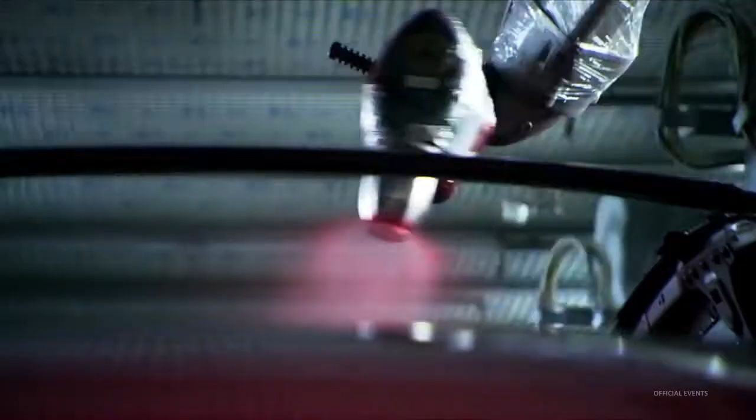This man has a vision to create the best electric cars ever seen and consign gasoline to history. This is something truly revolutionary. He wants to build his unprecedented Tesla car in a futuristic new factory and trigger an electric transport revolution. It's been a long time since something like that happened in the car business, but it's here. It's a dream many have had, but none have realized.

Aluminium bodywork, 19-inch alloys, and a $50,000 price tag. At first glance, this car is the latest in a long line of high-end sedans. But that is where the similarities end.

The Model S is a totally different type of car. Tesla believe it can lead a revolution and change the face of motoring forever.

It's the first ever mass-made premium sedan powered purely by electricity. Designed to have speed and range, and not a drop of gas. Our goal is to create an electric car that is the best car in the world and show that's what an electric car can be.

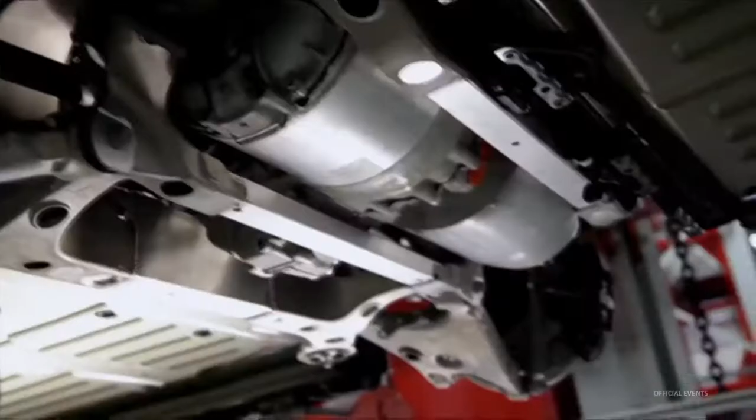Tesla's goal is to kill off the combustion engine and prove the electric car has finally come of age. Driving a gasoline car is going to feel like yesterday. Driving this car is driving the future.

This is Elon Musk, Tesla's co-founder and CEO. Elon is an inventor and a maverick entrepreneur, one of America's youngest billionaires. I like exploring, I like technology, I like creating things that have never been seen before or even imagined before.

He is a genuine Silicon Valley success story. In the mid-1990s, Elon set up a small internet company. By 2002, he'd sold PayPal for $1.5 billion. Next, he founded private rocket company SpaceX.

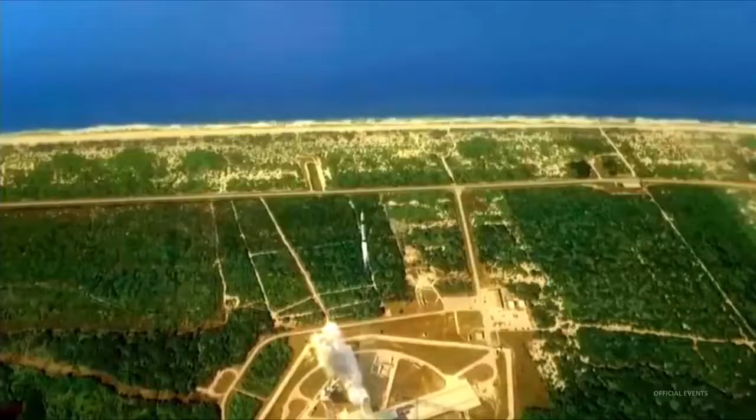It's all part of Elon's life mission. When I was in college, I tried to think about, well, what are the areas that would most affect the future of humanity? So the three things were the internet, making life multiplanetary, and the third being sustainable energy. So that's what really ties together my companies, that thought from 20 years ago.

Tesla Motors is Elon's sustainable energy brainchild. Named after electric power pioneer Nikola Tesla, it's a car company that only makes totally electric vehicles. No hybrid and no alternative fuels. Absolutely no tailpipe. The company estimates their electric cars cause 50% less CO2, even if much of the electricity comes from a coal-powered plant.

It's technology Elon and co-founder J.B. Straubel believe we need. We're solving problems for our children, our grandchildren. Oil is a finite resource, and eventually we have to find alternatives. When you take that oil out of the ground and burn it, it's extremely dangerous. We should not play Russian roulette with the atmosphere.

We only got one. Tesla's founders have a vision of a world without gasoline cars. They are convinced electric is not only cleaner, but better. Now, they want to prove it to the world.

They believe their cars can trigger a transport revolution and bring electric motoring to the masses. What we're doing here at Tesla can have an amazing impact and revolutionize the auto industry and make every car on the road electric. That's our end goal.

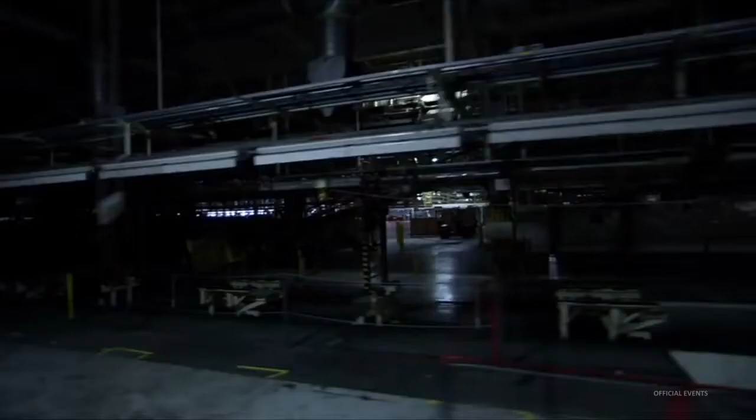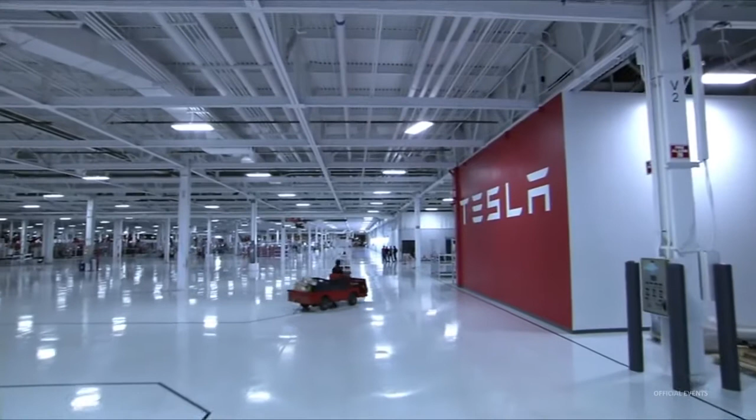The company purchased a former GM and Toyota site in Fremont, California, on the edge of Silicon Valley. The abandoned facility is a traditional car factory: dark, little natural light, bare concrete floors. When Tesla Motors move in, it's the birth of a mega factory like no other. It's a totally fresh approach to car manufacture.

The walls and floors are painted white, the machinery a striking red. Skylights and windows flood the factory with sunlight. If you make the factory pristine and clean, that sets the tone for the vehicle. We want that same sense of quality and precision in the car itself.

As part of the whole company ethos, bikes are provided so the workers can get around the factory. I think it's important to have an environment where people look forward to coming to work, so it's worth putting some effort into making the factory beautiful.

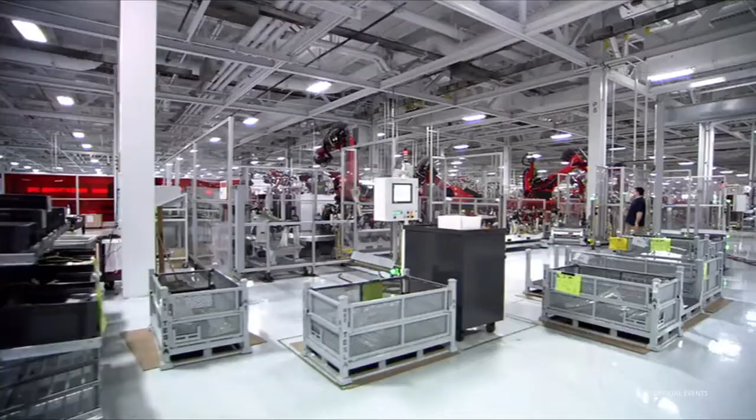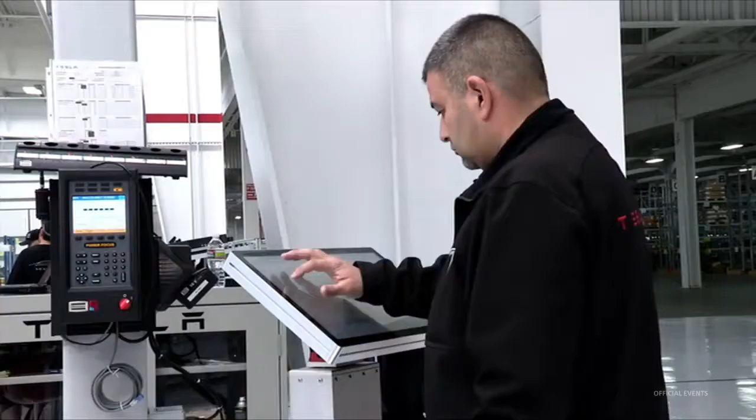In true Silicon Valley style, they fill the space with the most advanced technology, creating an automated production line capable of building tens of thousands of cars. Super efficient multitasking robots, self-guided smart carts, and computerized production schedulers.

The factory is designed to be up there with the very best in the world. We love engineering, we love beautiful machines, we love new technology, we love to innovate with high technology. And also in manufacturing, we love to do that.

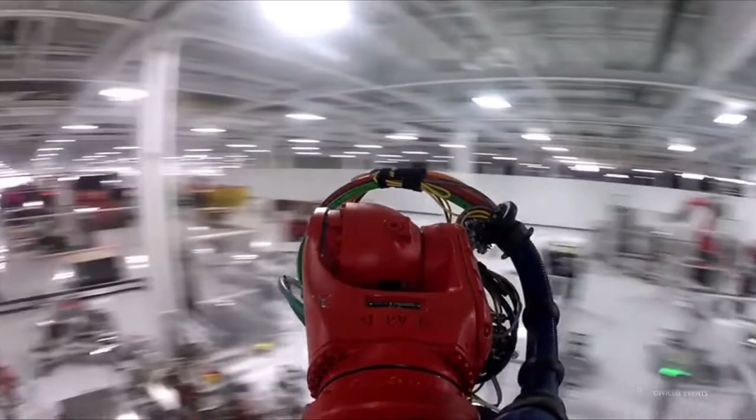Without training, these sophisticated robots are useless. They all need to be taught before they can run tasks automatically. Every robot is programmed by hand. The Tesla team has meticulously trained 130 sophisticated robots over a year and a half.

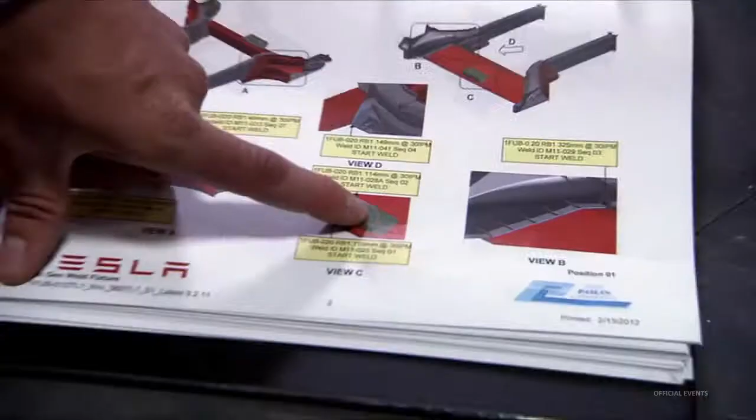One of the last robots still to be programmed is a multi-point welding robot. It will be used to join the car's underbody. These are pretty busy robots, so we gotta make sure that our takt time is good.

A robot's work is only as good as the man who trains it. Brad Johnson is a welder with over 25 years' experience at the highest level. Getting this done today, we'll have the teachings all nice and smooth, and then we can start running 100% and full automatic. That sounds good.

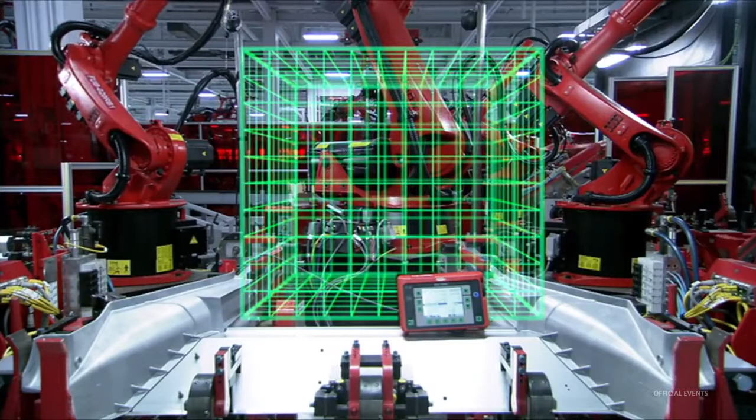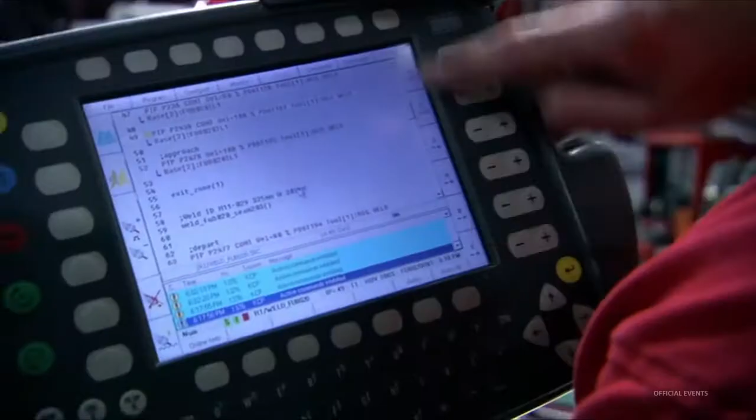The space in which the robot operates is treated as a three-dimensional grid. The head can be manually guided to any point using a teach pendant. There's our start point and our weld position. Brad guides the robot millimeter by millimeter and uploads the coordinates. The robot works out the most efficient route and runs the program.

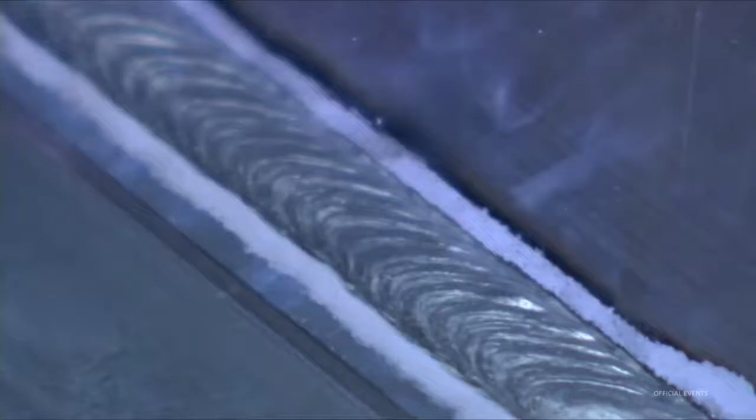Looks like the teaching is right on mark, and we have a really good quality weld right here, so we should be able to run full auto with this weld. When full production begins, Brad's handiwork will be exactly replicated by the robot 100 times a day.

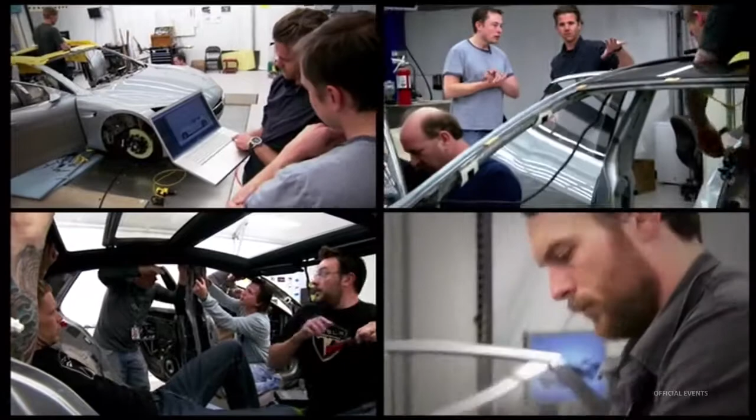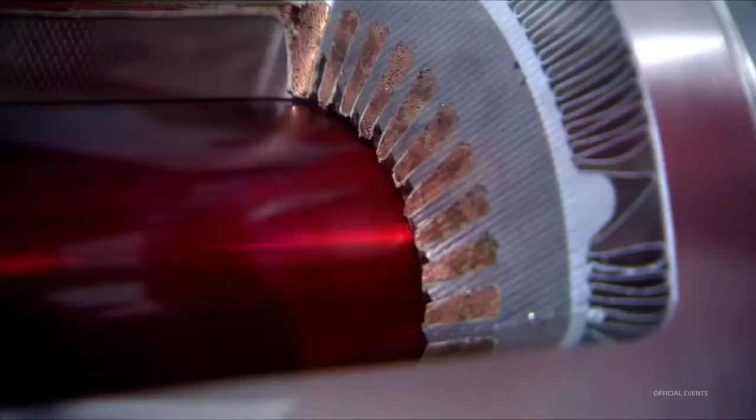Since their inception in 2003, Tesla Motors have been pursuing their electric car revolution with a step-by-step strategy. In an unconventional business move, Elon decreed that Tesla must invest in their reputation first and worry about profit later. Stage 1: make a small number of high-value cars that prove electric power can be desirable. The Tesla master plan is very simple - we start off creating an expensive, low-volume car to help break the mold in electric vehicles.

Plan in place, they set to work on their first car, basing it around the British-built Lotus Elise. Five years later, they released the Tesla Roadster. Quicker off the blocks than an Aston Martin Vantage, the electric sports car astonishes the motoring world.

Step 1 complete in the Tesla strategy. What we showed was that an electric car could be sexy, it could be fast, and it could be long range, and that if you produce such a car, people would buy it. But as a $100,000 two-seat sports car, it's a luxury second vehicle to most of its owners.

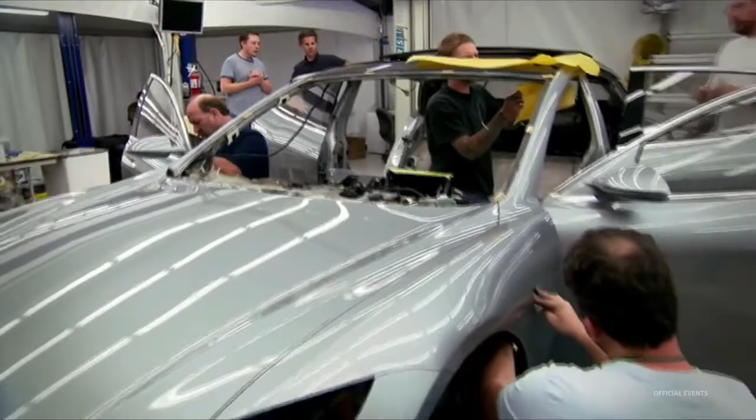Time for the pivotal Stage 2 in the master plan: a car that costs half as much and sells in much bigger numbers. A very important step in the Tesla strategy is really going to show that a mainstream electric car can be better than a gasoline car.

The Model S is the second step in Elon Musk's vision of an electric revolution - a premium mass-market sedan designed and built from the ground up by Tesla.

At the studio in Los Angeles, they are working to craft that car. The Model S is really the foundation of Tesla. It's the first true product designed, engineered, built, manufactured by Tesla, and it's really the beginning of what our mission is about.

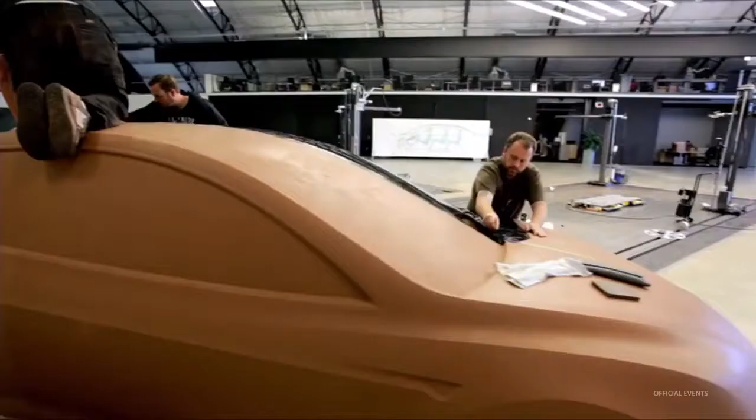Franz von Holzhausen is the chief designer. He believes Tesla's design needs to have some conventional appeal. It's really easy to have a clean slate and go pretty crazy with that. We had to start with something that people could relate to, if they even knew or cared that it was an electric vehicle - they were attracted to it.

We've stretched the sedan and made it a little bit more modern, but it's still a sedan. It still has this somewhat traditional cue, and so it's easy to love because of that association.

Although uniform in appearance, the Model S is a unique car. It was conceived as electric. Even the shape is designed to maximize the battery's range. The body and waist are all slim, so there's no excess fat or body mass on this car. That translates into great efficiency.

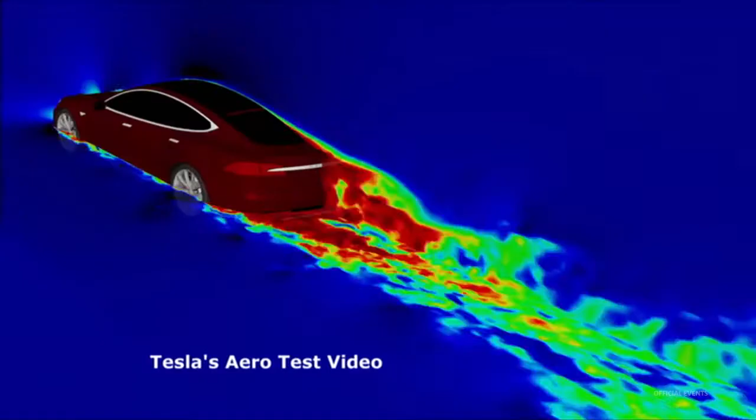This car is one of the most aerodynamic sedans on the market. In an electric car, conserving battery power is so important that the designers put huge efforts into reducing the drag. Even the door handles are aerodynamic, receding flush into the body.

But it's the interior that is most heavily influenced by the electric powertrain. The powertrain is incredibly small. You get the same performance out of a motor that's the size of a watermelon, fitting between the rear wheels, and everything else above that is what I call the opportunity space.

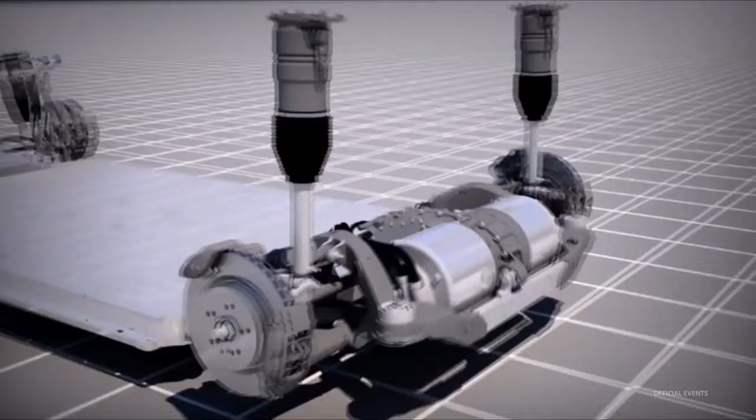The design team started with the motor and flat battery pack and worked upwards. With the motor next to the wheels, there's no need for a drive shaft, so there is no rise under the rear middle seat. There is no fuel tank or transmission. The Model S has free space from the floor upwards.

What you'll see is a vast amount of space. In fact, it's actually so big that we decided we could fit 7 people, and we do that by putting 2 rear-facing child seats in the back here. You can see where they fit, and their legs go right down in there.

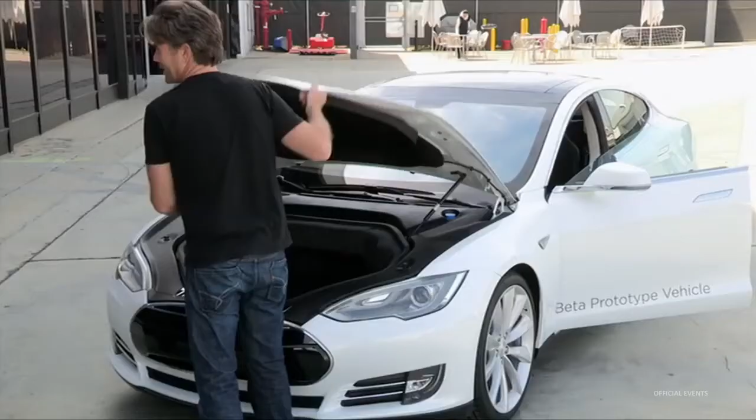So this is what we call the frunk, the trunk in the front of the car. Arguably you can put a whole bunch of stuff in here, even when the back of the car is totally loaded up with people and kids and stuff. And who doesn't need one of these?

Tesla promote these unique features at every opportunity. As a new marque, they're trying to make an impact in a marketplace crowded with established big hitters. Just looking at the United States, of the 3 other car companies, the youngest is 90 years old. So clearly this is not an industry that has been supportive of newcomers.

The Geneva Motor Show 2012. Another leg in the company's relentless promotional campaign. We're done selling Roadsters in North America, so this is our product, our Tesla product, and therefore we need to get it out to start selling.

Industry experts are judging Tesla on the Model S. It's seen as make or break. Maybe Tesla has a bright future. I think the Model S is very decisive to see if there will be a great future or if there won't be a future at all.

The company have taken the risk of collecting prepaid orders on the car. They've amassed nearly 10,000 advance sales. The financial boost also creates real pressure. I get harassed quite a bit actually by some people who have reservations, and it's a lot of expectations, very high expectations that we're going to have to meet and exceed, really.

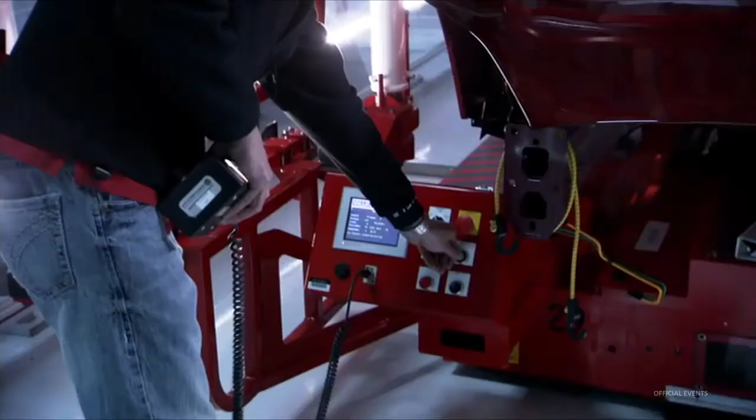Tesla need to build 20,000 cars a year. But before mass production can begin, Gilbert and his team must prove the factory is ready. The company is relying on them to get it right. We have to make sure that car after car, the quality is there, everything is perfect along the way. So we are really gearing up towards a production ramp-up.

Over the next few weeks, the factory will test manufacture a limited number of Model S. If the line doesn't perform with these cars, the company will be forced to miss their deadline. Tesla's electric revolution would be over before it started.

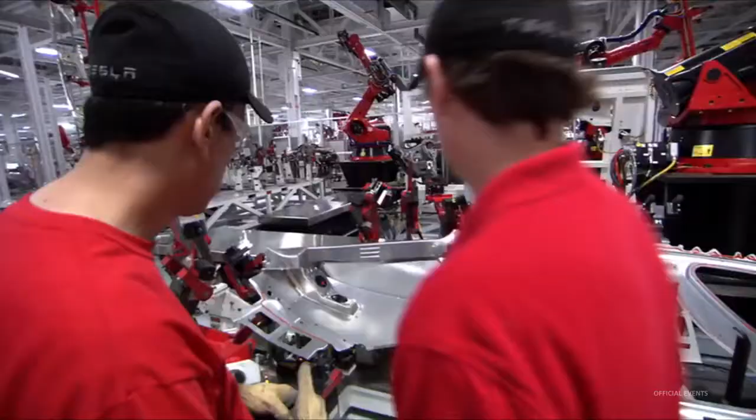A very, very important moment is the birth of Model S in our Tesla factory, and it's where the rubber is going to meet the road, so to speak. The process begins in stamping. To increase the battery's range, the company have decided to build 97% of the Model S with lightweight aluminium. It's an extremely rare feature in a mass production car due to the cost.

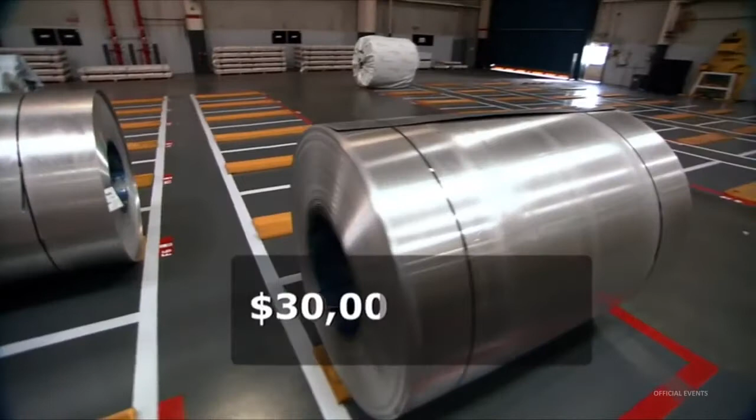Every Model S starts as one of these. The roll is loaded into the mechanical cutting machine.

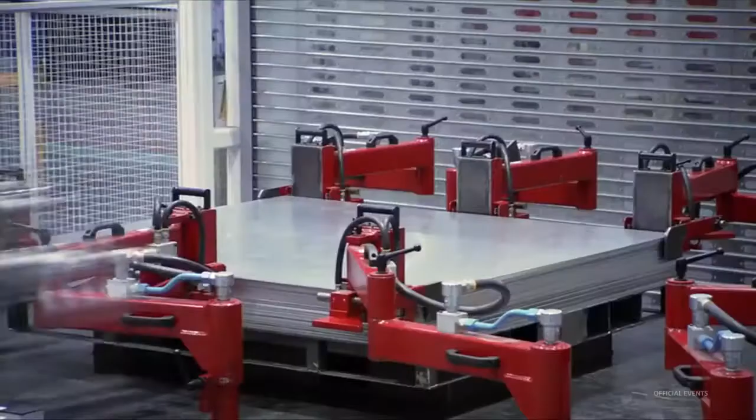Once cut, the panels are passed to the stamping press. We need to translate flat pieces of aluminum into 3D forms, and how to do this with the level of quality that we expect is really, really challenging.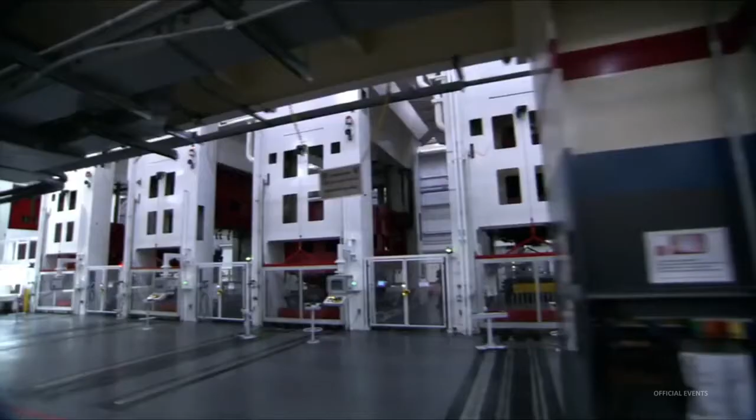To meet the challenge, they buy the largest available stamping press in North America. It's one of the first pieces of equipment they install. Over 3 stories high, it has to be transported from Detroit on 70 trains and then entirely rebuilt.

The immense pressure from the stamp allows them to press the complex body shapes needed for the Model S. It can be mounted with different heads, known as dies, that mold the panels into a wide variety of shapes.

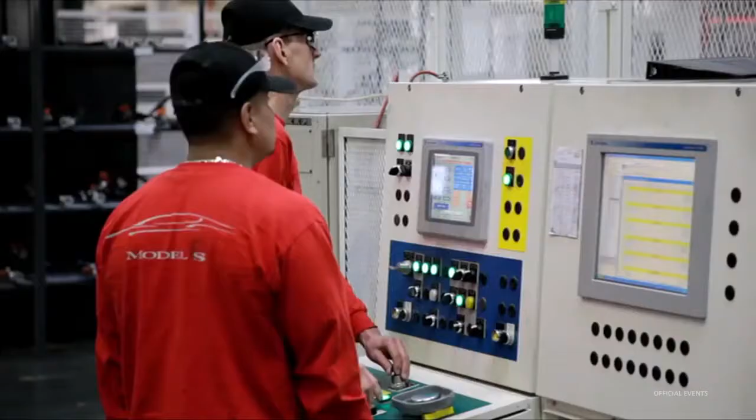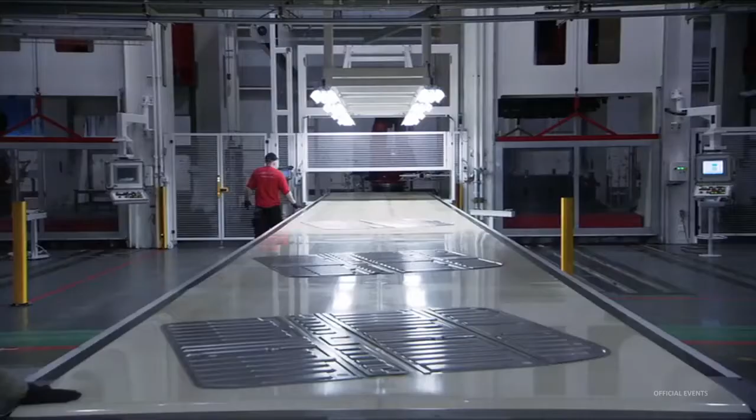Robotic arms feed the 4 stamps. Each stage forces a more detailed 3D shape, producing stacks of floor plates. These lightweight aluminum parts improve the Model S's power-to-weight ratio, which helps increase performance and range.

The 2 things that obsess co-founder and technical chief J.B. Straubel: 'Any ideas on how we could make it better?' Performance and range were the 2 big issues that needed to be improved, and that's where we've put most of our focus on the technology and powertrain.

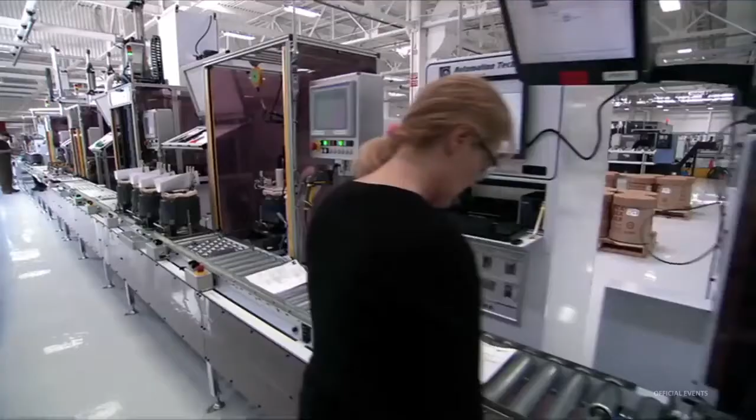Powertrain manufacture, 2nd floor. This is where they build the heart of the Model S, the motors and battery packs. Tesla know the electric powertrain will define their cars, so they push to advance the technology themselves. This is an extremely exciting field where inventions continue to happen even faster than they did in the years previous.

Tesla's solution to improving battery life appears startlingly simple. They use thousands of small lithium-ion cells, similar to laptop batteries. Thanks to these regular batteries, the company say the Model S has achieved a top range of 480 kilometers.

Once you have 250 to 300 miles of range, then you're in a different usage mode. You're in a range that is equivalent to most gasoline cars.

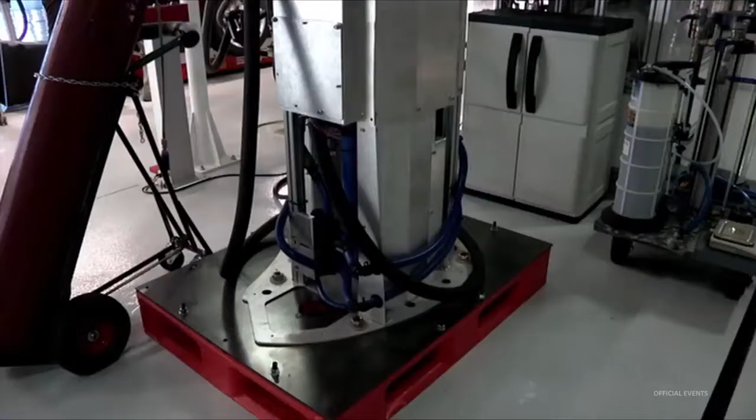The car can be charged by 100 kilometers every hour from a regular power outlet. Ultimately, Tesla are hoping to install superchargers along major highways that can charge the car to capacity in 45 minutes. You can charge the car up every night, but you don't need to. You can actually charge it once a week.

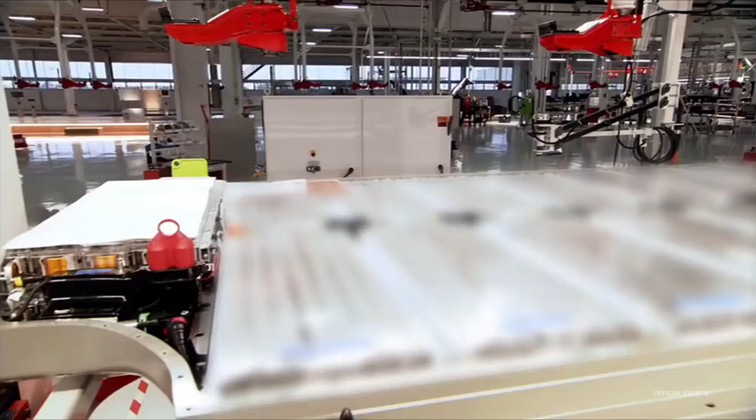The high-performance battery pack is formed with over 7,000 small cells. They're organized into a flat layer with specific groupings of positive and negative. The final layout is the key to the pack's power and range, and Tesla considers it absolutely top secret.

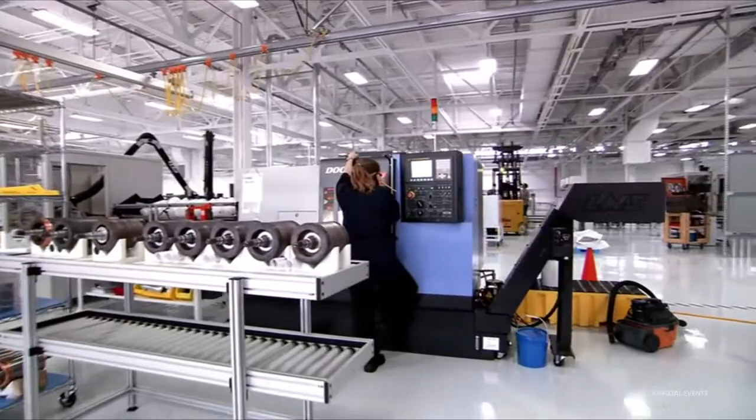The motor unit is also developed in-house. It's essentially an AC induction motor, a concept invented by 19th century scientist and Tesla Motors namesake, Nikola Tesla. He harnessed an electromagnetic field to turn a basic motor.

Modern-day Tesla has developed their motor with a highly conductive copper cylinder. When the electromagnetic casing is fed with current, the copper cylinder inside starts to spin. It's nearly 3 times more efficient than a combustion engine.

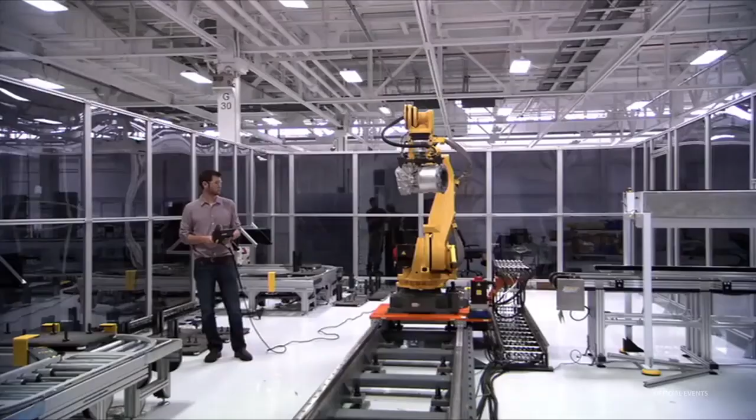In fact, there are only 3 moving parts. It connects directly to the rear wheels and doesn't need a transmission. These are the 3 moving parts in the whole Model S powertrain.

One of the cool things also with this very simple gearbox is that when we want to go in reverse in the car and back up, all we have to do is spin the motor in the other direction, and the car backs up. We don't need a clutch, we don't need a separate gear for reverse.

The entire drive unit is under 1 meter long, smaller than a golf bag. But it propels the Model S, a family-sized sedan, into the class of performance cars.

In fact, this powertrain creates a totally different driving experience. Program Director Jerome Guillen works constantly to refine it. As with the light switch, electric power can be fully applied instantly.

The first thing that's gonna surprise people is how much torque you get so quickly. That instant response, you cannot really mess with the throttle too much because if you push on it, then the car will go.

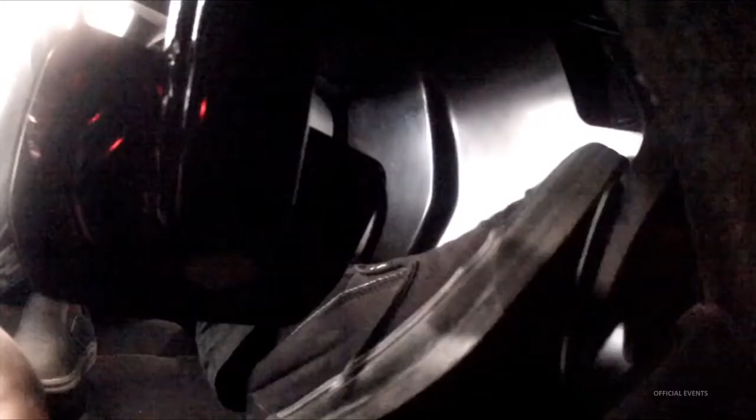But the real evolution in the way you drive is down to one of the central innovations in electric cars: regenerative braking. Although the Model S has traditional brakes, you don't have to use them. Regen braking can be engaged by simply easing off on the accelerator. When you want to brake, you just take your foot off the pedal, like I'm doing now, and the car brakes itself. So you don't need to use the mechanical brakes. When active, the regen system magnetically resists the motor's rotation, slowing the car and harvesting electric current.

The energy recovered recharges the battery and extends the range of the car. When you put your foot down again, the electric power returns. Tesla calls it one-pedal driving. It's a little bit different approach to driving, but once you realize that if you take your foot off the pedal, the car slows down, it's like, whoa, this is great. I can drive using only one pedal.

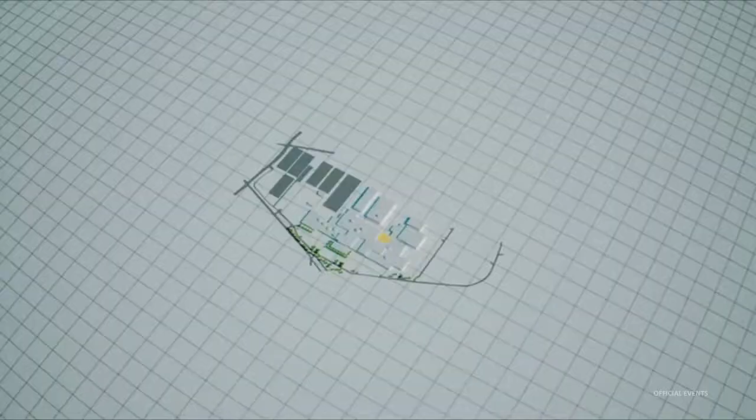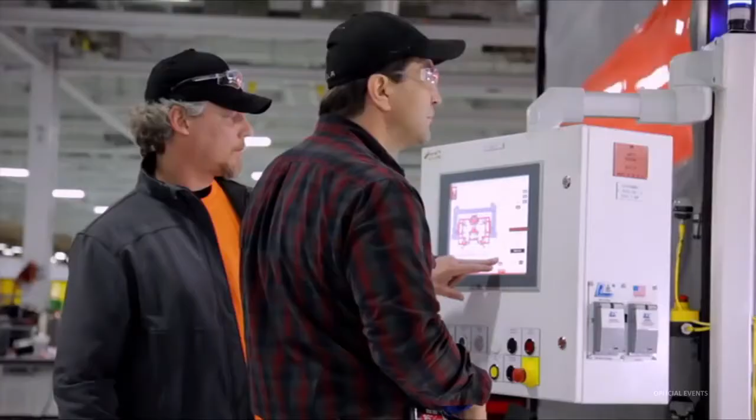In the factory, the delivery deadline is fast approaching. The Model S test production cycle reaches the main assembly area. The car is based around an aluminum underbody. To make it, engineers weld struts and casts into a framework. Brad's newly trained welding robot is about to be tested in full automation. They have trained the robots with prototype parts. Now, with final components coming through successfully from stamping, it's automated production for real.

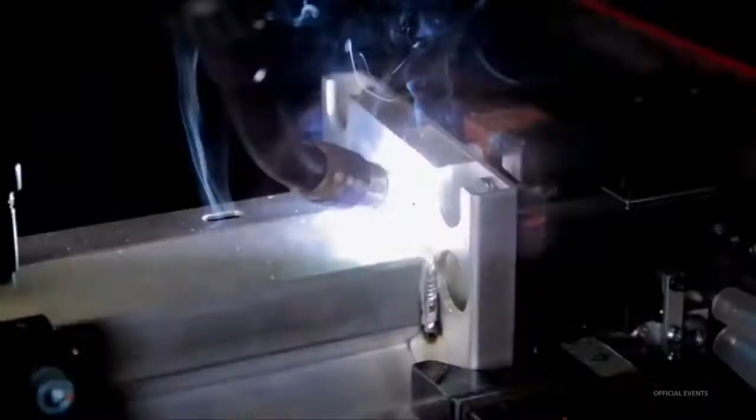Under observation, it's a tense time for the team. The robots work in a tightly coordinated chain. The second phase hits an issue. It shuts the whole process down.

With the deadline looming, Elon Musk is determined to keep Tesla's waiting customers happy. He's organized a Model S test drive event for people who've placed deposits. The test ride will go out onto Jack Northrop Boulevard, so you'll get a chance to see that this isn't some show car that doesn't actually do what it says. It will go fast and with a lot of people in it. And quiet. Yeah.

Many have prepaid years ago, and it's their first time inside a drivable Model S. Customer and board member Steve Jurvetson captures his experience on his mobile phone. Wow, this is insanely cool. It's a surreal scene. It's way cooler than I can imagine. You really decked this out. Yeah, it's nice. The first ride has to be documented here.

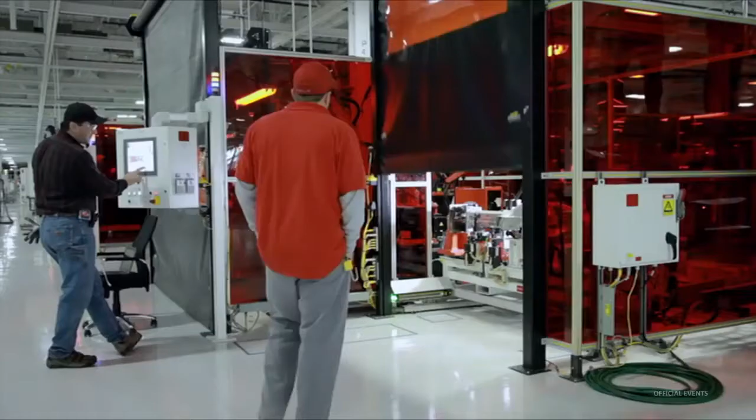With only weeks to go, welding has hit a glitch in automation. One of the robotic clamps is millimeters out of line. It's a tiny difference, but enough to disrupt the process. With the way the robots work and how we have such a tight tolerance of 1 millimeter to stay on, sometimes the new parts won't reach a prox or the clamp won't close all the way. A major delay will disrupt the whole production schedule and threaten the deadline.

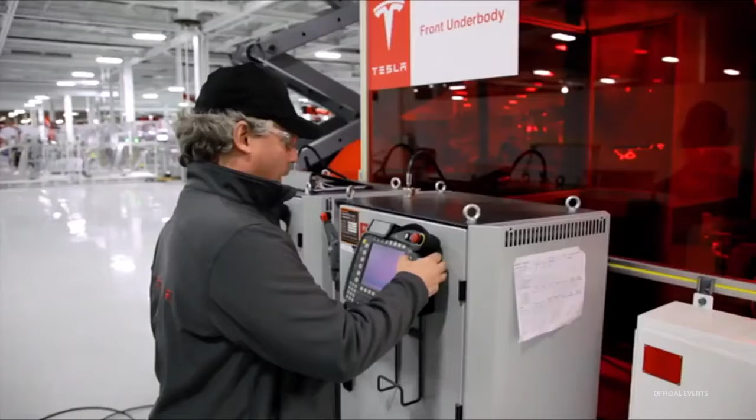They adjust the settings and set the robots in motion again. This time, it goes off without a hitch. To the team's relief, the process can be approved for mass production.

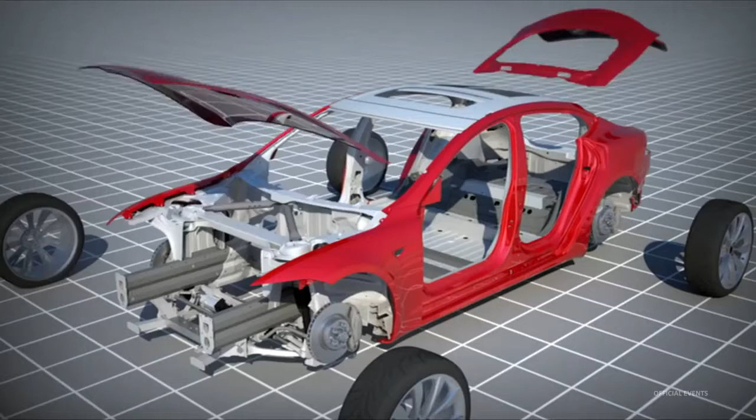The run through the automated line reaches the Model S exterior. The Model S body is made up of 14 different sections. To speed the workflow, Tesla construct each section at separate sub-assemblies. Door sub-assembly: the internal frame is joined to the exterior panel. As the robot's pincers come together, they fire a rivet and join the aluminium sheets.

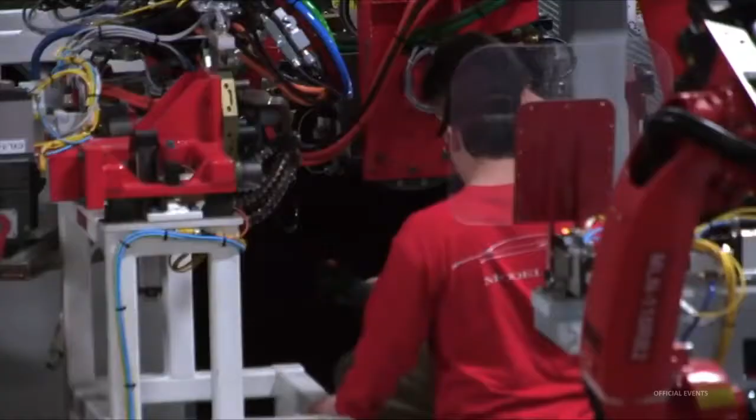Over to the right, side body sub-assembly. One of the most advanced aspects of Tesla's robots is that each arm can perform a variety of different tasks. We have to use all the gamut of technology to make the aluminum joint between stamping and welding and riveting and bonding, using robots that are multitasking. This flexibility is essential for a compact and efficient workflow.

A robot can spot weld using a pincer tool and then automatically detach the pincer and pick up a clamp tool. The same arm that joined the panels can now move it to the next station. It's clever, but tricky and needs constant refining. When you draw something yourself, you take a pencil, then an eraser with the same hand, and you change the tool, so to speak. Same thing here.

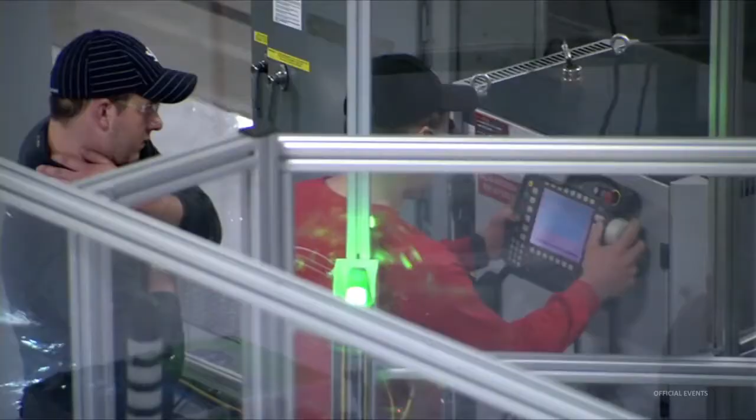Once assembled, the sections are brought together at body assembly. Here, they're riveted around the welded underbody to form the basic shell of the car. All the sections are lined up alongside the central framing line. Gradually, the automated line builds up the side sections, ready to house the doors.

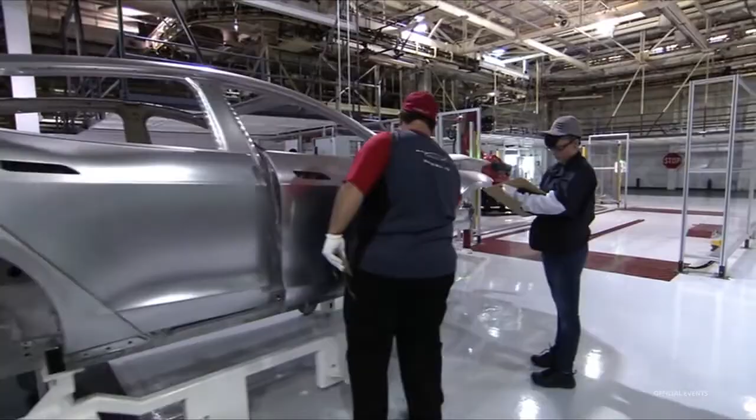A test batch of 3 cars is complete. Body assembly has demonstrated it can run successfully in full automation. It's a vital milestone in the countdown to mass production.

Completely assembled, the aluminium body is now known as body in white. It's ready for some color. The body in white is loaded onto an overhead train that carries it to the paint area.

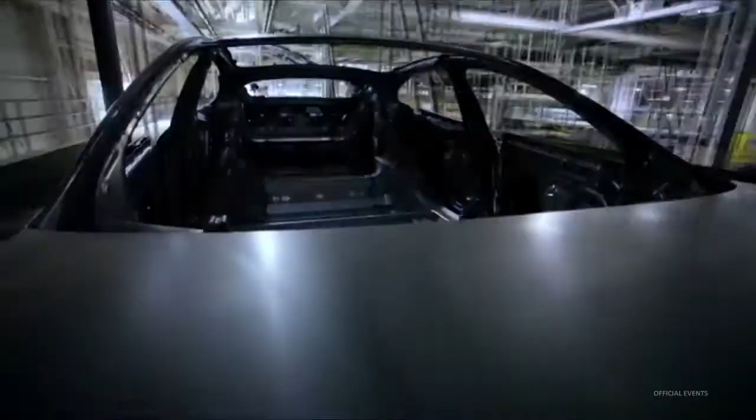At this vast facility, the paint center is in a totally separate building. The Fremont site covers nearly 95 football fields of space. It's so big, the Model S production line only fills 20% of it.

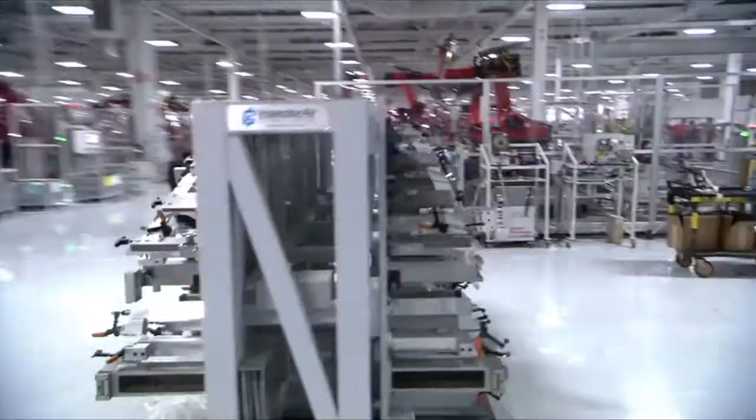For Gilbert Passin, the extra space is the cornerstone of Tesla's grand strategy for an electric revolution. The Tesla factory is huge, about 5 million square feet on 2 levels. Right now, we are only utilizing a small fraction of the space, but most of it, as you can see behind me, is what we call the dark side. It's sort of dark and not utilized yet, even though we have a lot of plans for the future on how to fully utilize this entire building.

These expanses are an integral part of the company's stage-by-stage building plan. They want to fill the space with a production line for a further range of Tesla vehicles - a very high-volume, economy-priced model, the Stage 3 car. In the future, we intend to expand our range of vehicles, maybe of a smaller size and also more affordable for the market. And this factory is ideal, and we are going to make this a super mega factory.

Long term, Fremont is meant to produce the low-cost Stage 3 electric car in the millions. It's the final step in Elon Musk's Tesla master plan. To really have widespread adoption of electric cars, we have our 3rd generation vehicle, which would be a low-price, high-volume vehicle, and that's really what's going to fill out the rest of this humongous factory. I'd love to bring this to 500,000 vehicles a year as soon as we can.

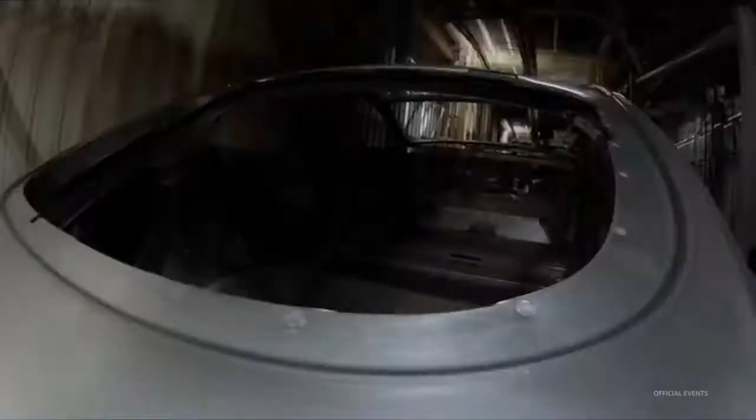The future of Elon's strategy first depends on the success of the Model S. In production, the time to the delivery deadline is now running low. The aluminium body arrives on the overhead train from Body Center to Paint Center. This is where they make the car look like a premium sedan.

It's a state-of-the-art process. There's a lot of technology that goes into the Tesla car, but the very first thing they'll tell you is what color of Tesla car they bought. That's how important the paint is.

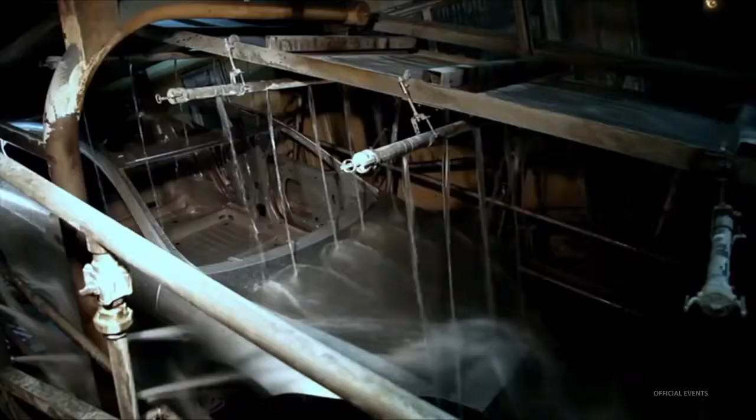First, a roller coaster ride of treatment baths. Detergent to clean the surface, and then electrocoating. The electrocoat helps attract the paint to the aluminium.

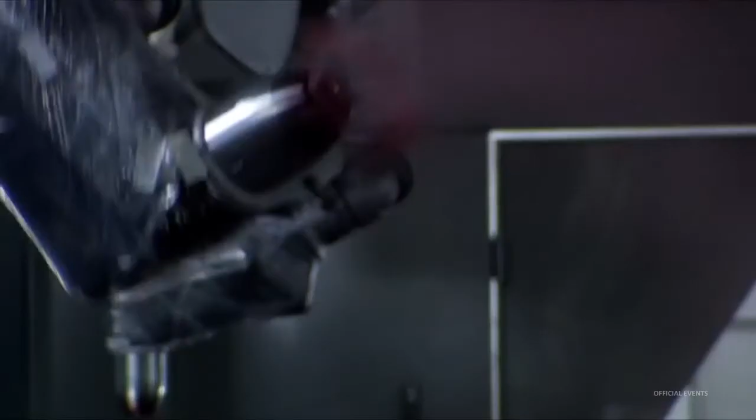The primed car is ready for colour. This vehicle will be sprayed with their trademark tint, what Tesla calls Signature Red. It's a color that we developed that's different than anybody else's red. It's been developed with glass flake to get the specific type of sparkle that we want to get in that paint.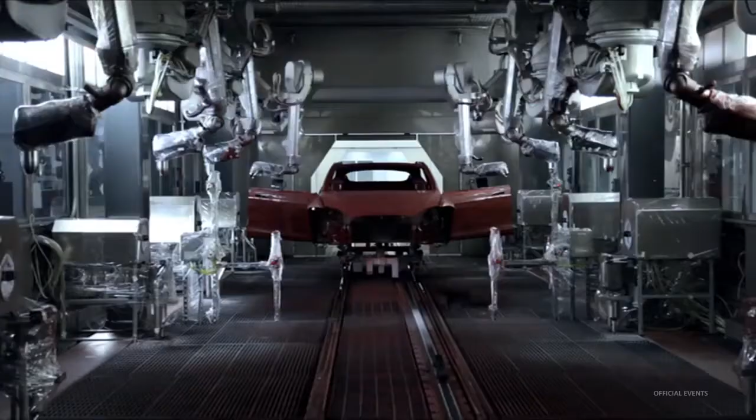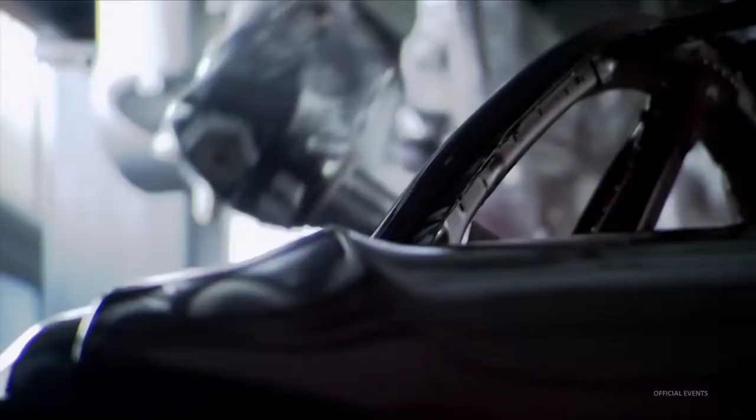It's a masterpiece of perfectly choreographed automation. Even the paint robots multitask, using a handle to open and close the doors. Once it's through, the painted body heads up into the ovens to be baked and double glossed.

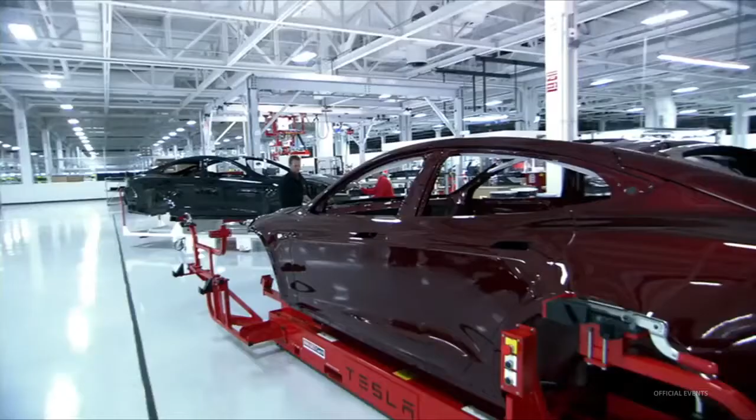A specialist team spends hours assessing the finish before the car is passed. Elon's made it very, very clear to us what his expectation is for the paint job. He wants our paint to look like glass, to look like a piano finish. That's the challenge we've been given, and that's what we're going to do. The Model S spends over a day and a half in paint, and that attention to detail carries through to general assembly.

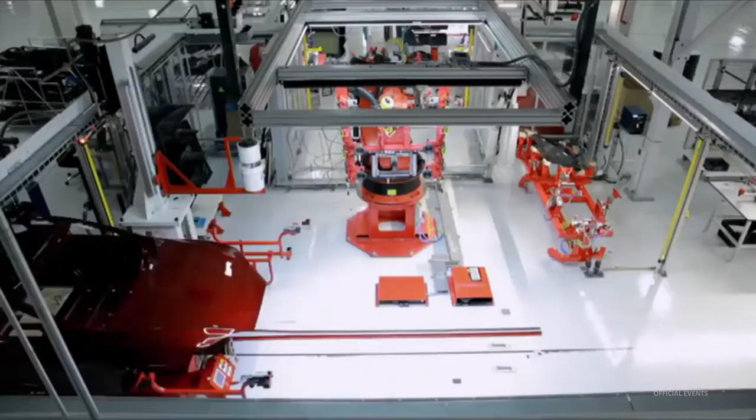First, the Model S's panoramic glass roof. The installation robot takes a picture of the top of the car, using the digital image to measure the exact orientation and bond the glass.

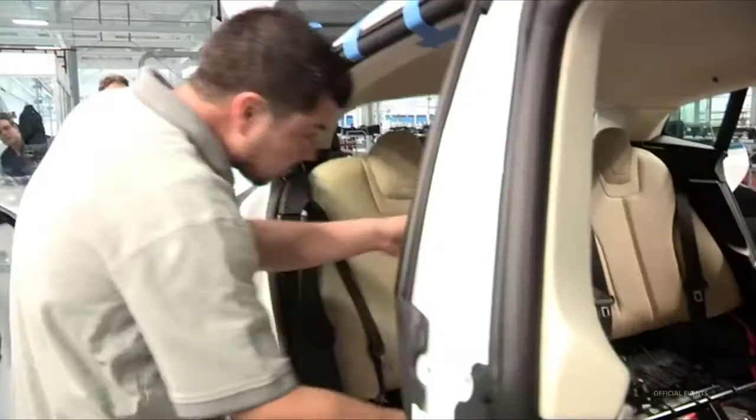Next, the interior. The wiring and seats are fitted, and the aerodynamic door handles are installed. To get the delicate installation right, a wireless system adjusts the torque for each bolt.

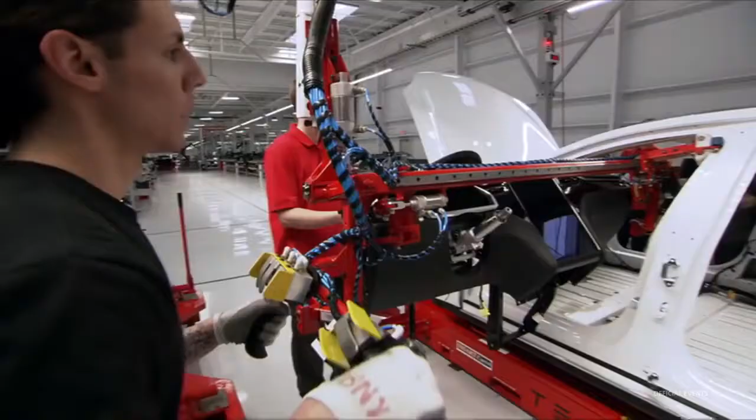The cutting-edge dashboard is lowered into the car. It's proof the car is a product of the tech-savvy US West Coast. The Model S carries a touchscreen tablet inspired by Tesla's Silicon Valley neighbors.

Tesla is very much a Silicon Valley company that has a Silicon Valley operating system, similar to a Google or Facebook or Apple, joined together with a tremendous amount of great automotive expertise. It's about bringing the things that we're used to, our phones, our computers, and the interaction that we have with them, into the car.

The car has a mobile 3G internet connection. The driver can download software upgrades and customize the display. The car's always connected to the internet, so we can understand your daybook, and we can know that you're going to work at 8 a.m. on Monday, and the car can be warmed up for that experience.

The entire command center is housed on the 17-inch tablet. The interior is virtually buttonless. It does some really amazing things. Not only does it make the rest of the interior super clean and uncluttered, it allows you to have amazing control of the car, with just a push of a button.

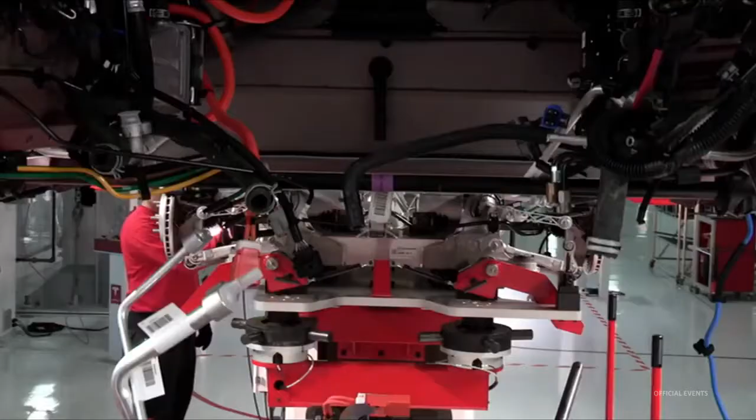In gasoline cars, installing the drivetrain is a lengthy process. With electric, it can happen in just 2 steps. Step 1: the motor unit, complete with suspension and brakes, is bolted into the rear wheel berths. There is no drive shaft or transmission to be attached. In one motion, it's fitted.

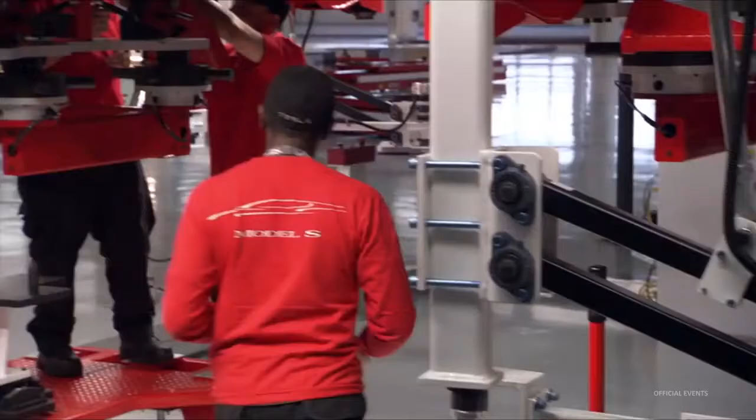Step 2: battery pack installation. The pack's steel case acts as the car's chassis. Bolted into place, it gives the Model S its rigidity.

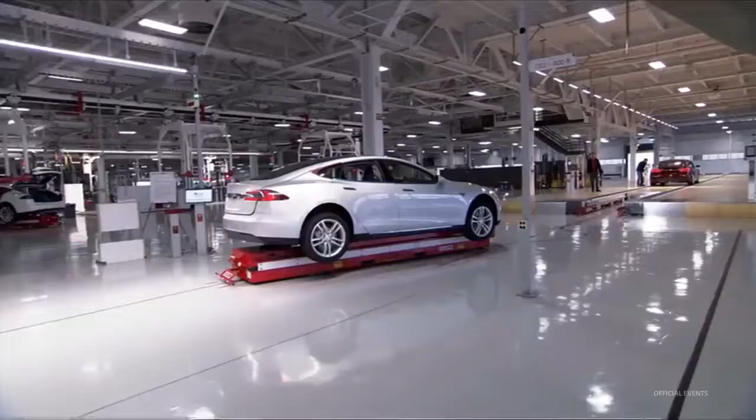A stage along, the first complete cars arrive at final inspection. At Elon's insistence, inspection happens on a bamboo platform. He believes you can only judge a car's beauty if it's framed by beautiful surroundings.

The last check is the test drive. At Tesla, the track is very different. Because electric cars produce no exhaust fumes, they can be driven indoors.

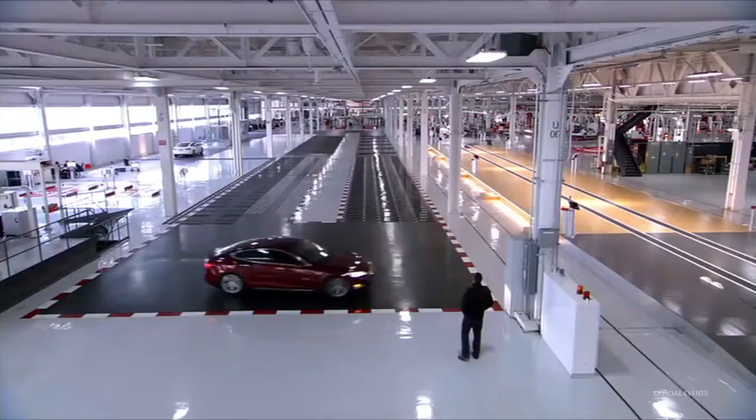Our people have done so well at putting this car together. You can see the remarkable quality of the paint and the entire vehicle, the body fit and everything. I'm so proud today.

This is the first Model S to pass through the production test run, and its quality proves the new megafactory is ready for mass production. It's a big moment for the company.

Just to see this car going around the test track here, it really demonstrates the fact that the Tesla factory is ready to go. I just have to make 20,000 per year more of this kind, and it's sort of a done deal. We just have to get it done.

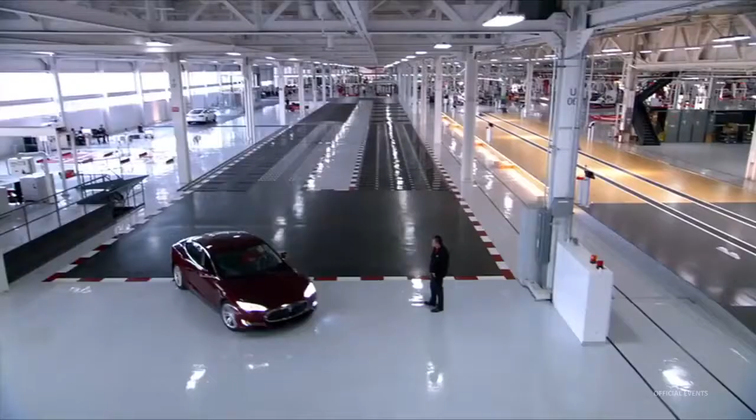The factory can now push towards the delivery deadline, allowing Tesla to pursue their strategy for an electric car revolution. Can you imagine if all the cars in the world were able to have zero emission, zero noise, and we could do that in a perfectly clean environment? That would be so cool.

This is Tesla's vision of an all-electric future. No fumes or heat, no noise or dirt, no expensive gasoline. Just clean and quiet streets.

It's truly impressive to see how we are, day by day and person by person, changing people's thinking about what electric vehicles are versus what we've all grown up and taken for granted. If we can do that through one product, that's unbelievable.

10 years from now, Tesla will change the perception of what mainstream cars can be, and it'll become clear that electric cars truly are the future. The Tesla Megafactory may have just built its place in history.